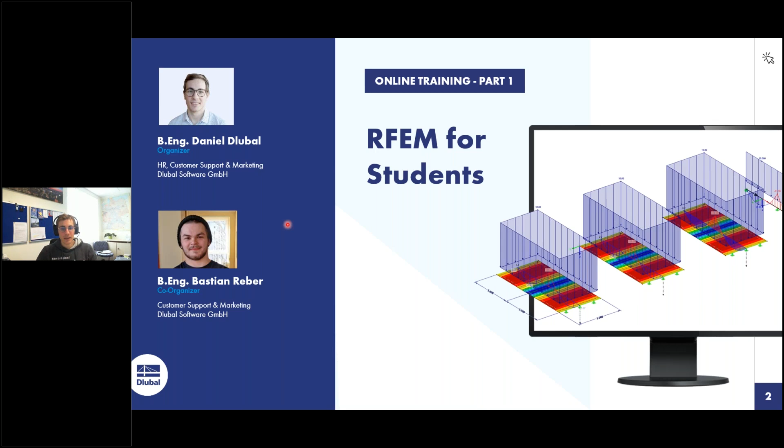Now let's go ahead. For those who are using the GoToWebinar platform for the first time, I would show you the general concept. If you use the desktop application, it can look like that - show or hide control panel. When someone can't listen to us or hear us, just adjust your audio settings, maybe change speakers, and then you can hear us. And if you have any questions, put that in the box, and Bastian or I will answer it.

Then, what is the content of today? First of all, I will explain the principal theory of finite element analysis, or finite element method. Don't be afraid, I won't make lectures like in the study, just 2 slides of very basic theory of finite element method. Then I will introduce you to RFEM, explaining the general user interface, the general concept, the general functions, where you can find what, and so on. Then together we will try to model and calculate a continuous plate.

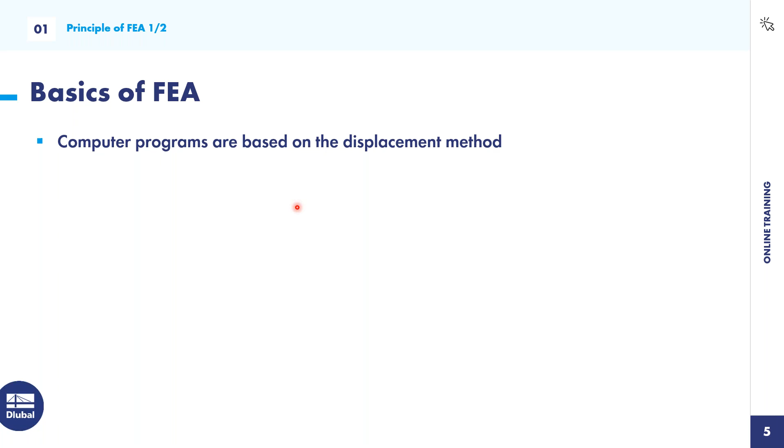But computer programs use the displacement method because it's easier to implement, more convenient, and easier for calculations in the programs. So if you look at any complex structures, it's normal that the analytical solution isn't easy to find.

This is also the reason why real structures are decomposed into a mesh of finite interconnected elements. At each element continuum and at each node, the properties, especially the degrees of freedom like deformation or restraints, are described. So normally the finite element analysis is just a numerical approximation of an exact solution, where the mechanical behavior is described by approximation.

The whole process of decomposing a structure into finite elements is called discretization. Remember that, this is very important: discretization is the decomposition of a structure into finite elements.

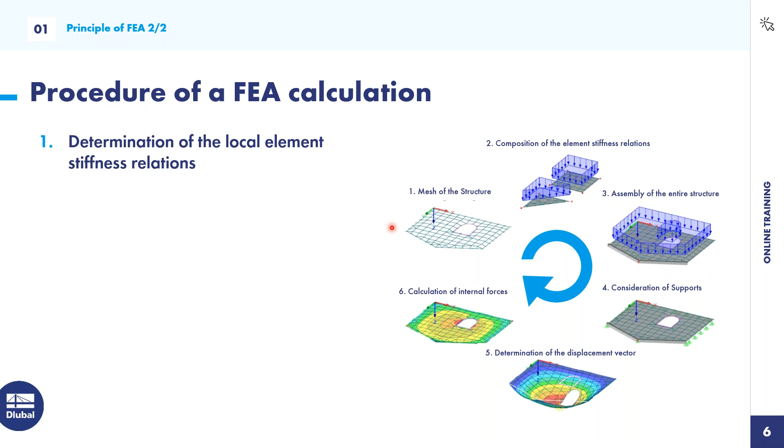So what is the general procedure of an FEA calculation? On the right side you can see this image with the basic steps. First of all, we do the discretization — we determine the local stiffness relations, the local element stiffness matrix at each node. So we mesh the structure, we do the discretization. Then we transform it to the global coordinate system and assemble the entire structure.

Then we also have to consider different supports in order for the structure to be stable. So the boundary conditions are very important to define, and normally the boundary conditions are the support conditions.

As we said before, the displacement method is the method implemented in computer programs. So first we determine the displacement vector, and after that the internal forces like bending moment, shear forces, normal forces, tensions, stresses, strains, and so on. This is also called the solution of the equation system, and then we determine the support forces and internal forces.

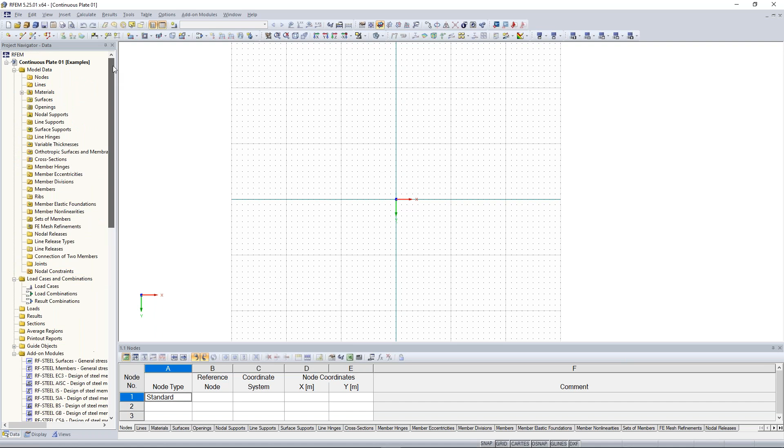Good. So I will explain you now the whole user interface of RFEM. You don't have to do it now with me because I will open another project where I can explain the whole user interface on an already existing project. So just watch and remark maybe some information. I will open here this one. So fine, very good.

I will activate here in the status bar the snap and grid function. So chronologically, the first step is that we have here the menu bar, and here we have the possibility to do almost every kind of workflow function of RFEM.

The basic file functions - you can save, open, import, export, you can insert blocks, save it in the project manager, print, and so on. I think this is known from other software applications.

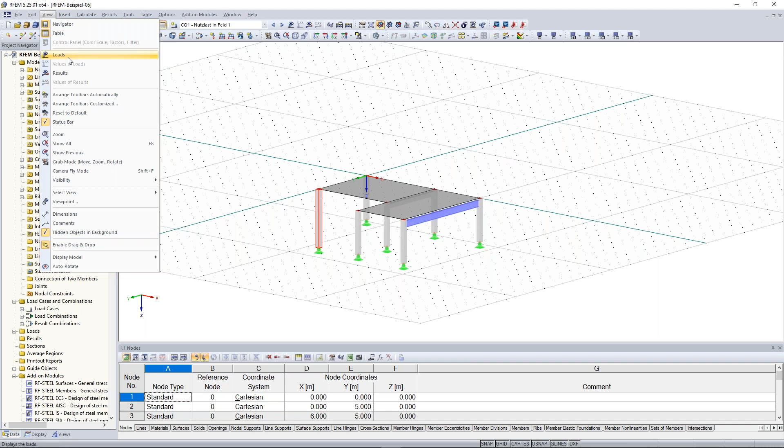Also, you find here additional information concerning the model data, loads, load cases, and combinations. In the view, you can click on loads, then the loads will appear, or click on results - because we don't have any results at the moment, the program asks me if I want to have the results, and I click yes. Now I see also the results, and some other kind of things like comments, dimensions, and so on.

So insert - with this tab you can insert almost every object, from model data to loads and also to load cases and combinations.

The general step in RFEM is that first you model all kinds of necessary objects. So you define materials, cross sections, and then you can also model members, hinges, and finally nodal supports. Then you create your load cases and combinations, then your loads, and then you can calculate it, and you have the possibility to watch the internal forces and the results. This is the basic workflow in RFEM for calculating projects or doing structural analysis.

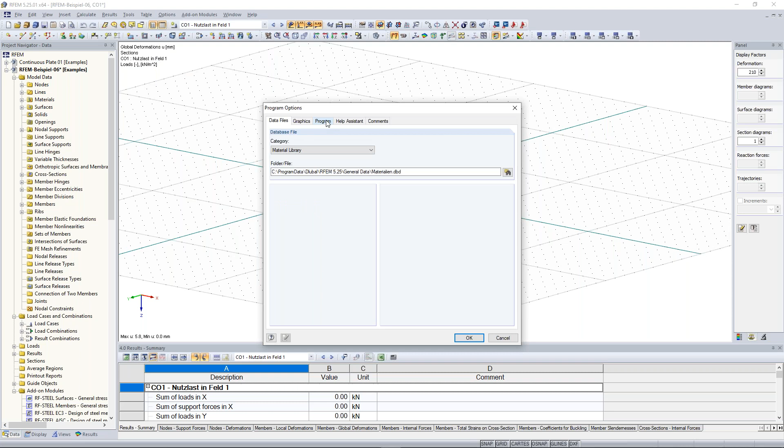The other bars here enable you to access other kinds of projects or functions. Maybe this one is very interesting: the options in the menu bar when you want to change the language. Especially for those from Italy, France, Spain, or similar countries, we have the possibility to change the language into, I think, 10 or 11 languages. The whole interface will change after you quit and restart the program. So Italian, Polish, French - these kinds of languages we offer.

Maybe you see in the background I use a white background here. For those opening RFEM for the first time, you can change your background. In the options, in the configuration manager, you can change the background to black or white. At the moment I use white, but when I double-click on black background, it will change to black. You can also adjust a green or red background - just use the display properties for other colors, and you can adapt your background.

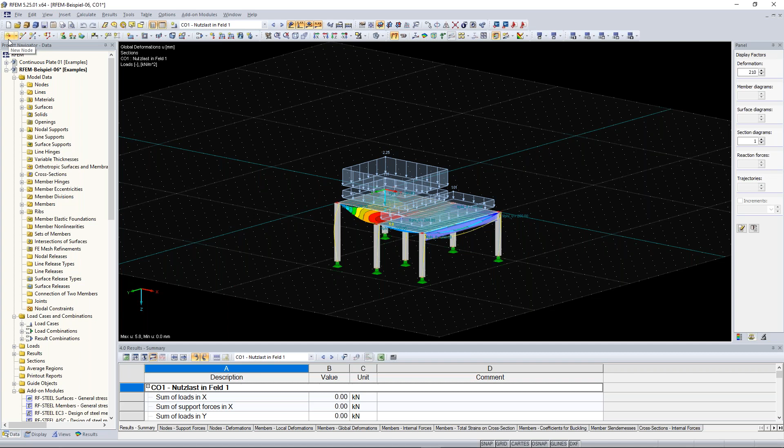I think that's everything for the menu bar. Under the menu bar we find the symbol bar. The symbols enable a fast way to insert objects, views, or edits. So if I want to create a new node, I click on new node, click somewhere, and get new nodes. The same with lines, for example - I click here and then here. This is pretty clear.

Now I will undo it, and I will also change my background again to a white background.

On the left side, you also find the project navigator. It is divided into four registers: data navigator, display navigator, view navigator, and results navigator. In the first one, the data navigator, you find all kinds of objects, beginning from model data, continuing to load cases, loads, results, and so on. You can create new objects, for example, by right-clicking on a node and selecting edit node or new node.

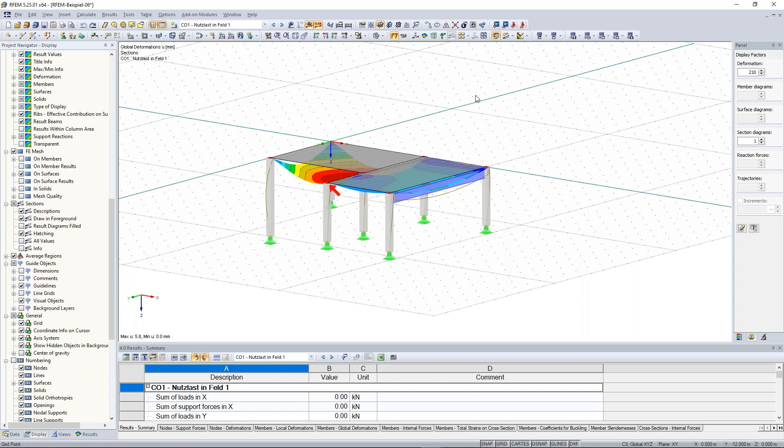You can also hide some kinds of models, like for example the nodal supports. Just click on nodal supports, and the supports disappear, but only in the visibility. The same here also with the results and FE mesh - so when I don't want to see the FE mesh at the moment, click on that and you don't see it.

So far to the display navigator. Let's continue with the view navigator. Sorry for my bad spelling.

If you like a certain view, for example this one, you can create a user-defined view. Just click here on create new user-defined view, favorite. When you rotate or move away from the model and want your favorite view again, just click on favorite and it jumps back to it. This is a big advantage, especially when working with more detailed or complex structures or projects, where you can use these user-defined views.

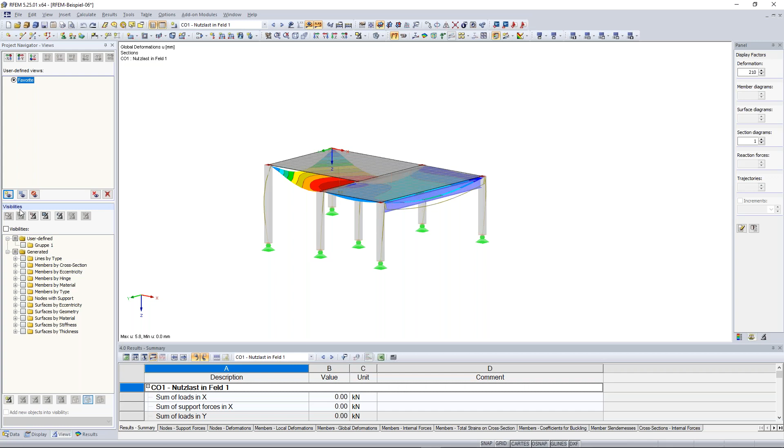With the help of visibilities, you can filter things better. For example, I just want to see all cross sections of this concrete. Go to members by cross section, open this tree and activate the rectangle 300 by 300. Now only this kind of cross section is visible and possible to modify.

You can also right-click and this menu appears, then click on display model, show hidden objects in the background, so the surfaces will disappear and it will look like that. To undo this visibility mode, click on visibility by selected objects, click the arrow, and then cancel visibility mode. You can also do the same thing here.

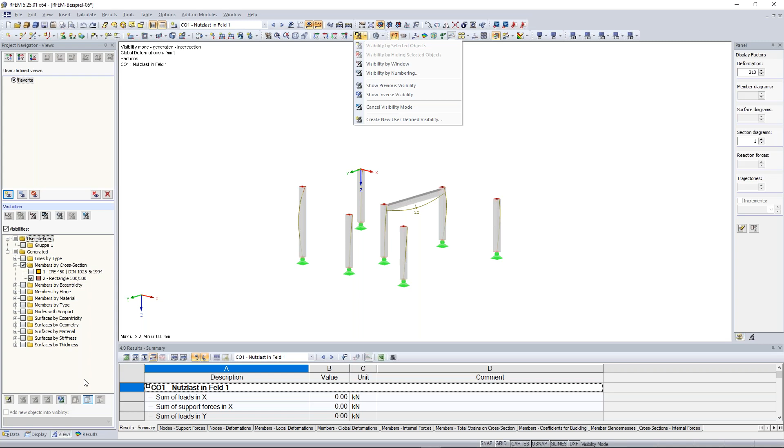Now the last navigator, the result navigator. Here I can see results like deformations, stresses, internal forces of members, and also support reactions. At the moment I see the global deformation of the whole structure, from both the members and the surfaces.

If I just want to look at the members, I click on members and choose the right internal force. In this case I choose the normal force, and there I can see the compression forces in the concrete columns.

Also here, surfaces internal forces, mx, my, and so on. And also the support reactions with the components px, py, pz, and so on.

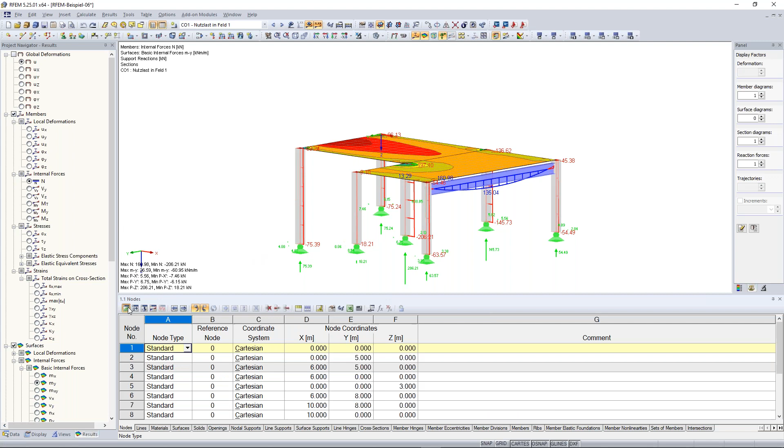So much for the navigator. Now, on the bottom of our user interface, we have also the tables. With the tables, we have the possibility to view all information and also to insert and create new information or objects. For example, I can create a new node here.

So I click on standard. Reference node is my node here, and I enter the coordinates. I click here on x 14, y is 0, and z is 3. And I see the created node here.

This is also possible for almost all other kinds of objects like lines, materials, surfaces, solids, and so on. You can jump to the next tables by clicking the next icons. Now I am at the load cases, nodal loads, or also member loads, line loads, surface loads, results, and so on.

Now maybe to the movement of the RFEM model. With the middle mouse wheel, you can move your whole project.

By clicking the left mouse, you can create a selection window. When you do it from the left corner to the right corner, you select everything which is completely inside this selection window. So in this case, it would be the whole right column with the nodal support and also the node on the top.

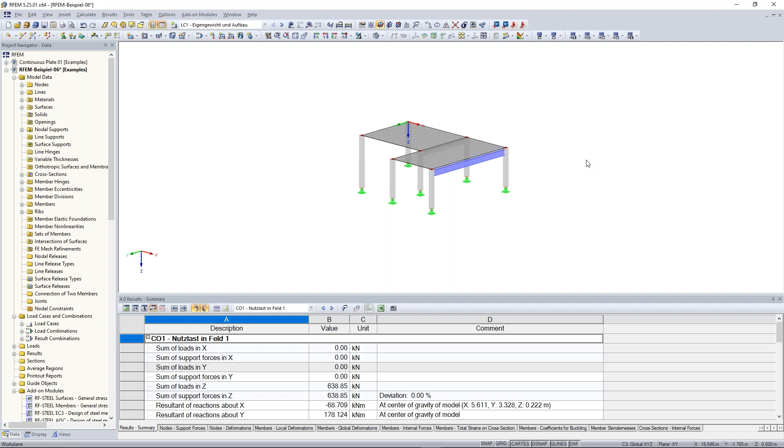With the mouse wheel, you can also zoom in and zoom out. I think this is clear. When you press the control key on your keyboard and also press the mouse wheel, then you can rotate this structure. And when you press the shift key and also the mouse wheel, then you can zoom in and zoom out.

We offer these possibilities also with this icon here in the icon bar: move, zoom, rotate, and so on. There you have the same possibilities.

I think this was everything. Bastian, have I forgotten something or do you want to add something? I think you haven't forgotten anything, and there are also no questions. So I think you can move on.

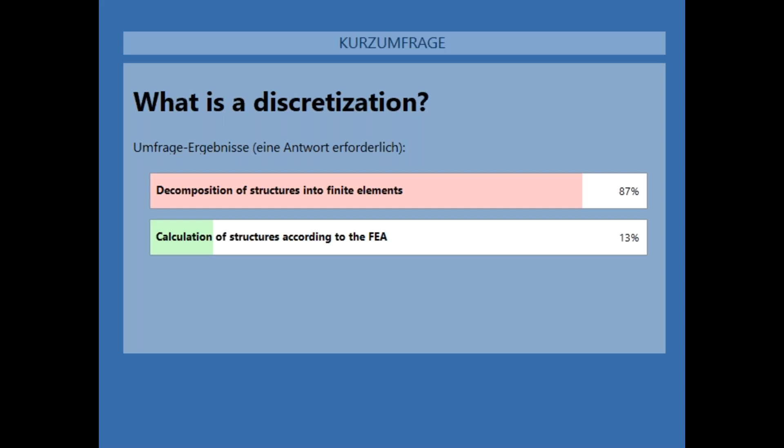Very, very good. So let's start our example. Jump back to the continuous plate. Let's start modeling it. First of all, I create a new surface. In the symbol bar, I find this icon, new rectangular surface, and by clicking on the arrow I find other kinds of surfaces too, but for me it's good to use this rectangle one. I click on that and a new window opens.

The next thing I'm going to do is create the material. In this case I use the Eurocode concrete C30/37 material. For those who don't have this material, no problem - edit the material by clicking this icon and open the material library. There I have the possibility to filter different kinds of materials like concrete, metal, timber, and so on, and also the material category itself, like concrete and lightweight concrete, defined according to the standard.

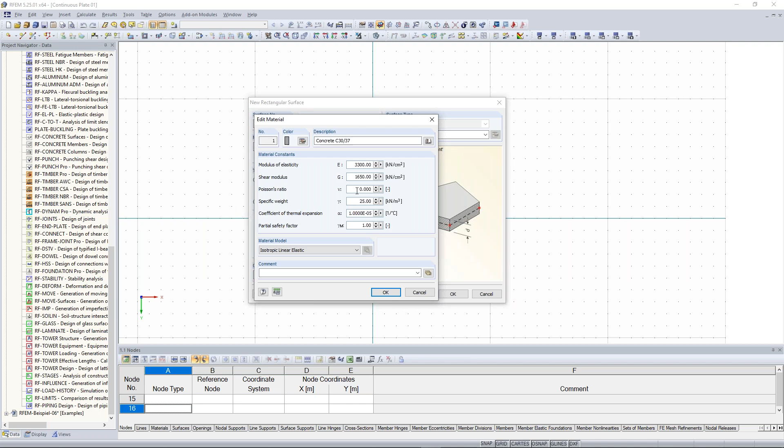I click on OK. Important note is that we set the Poisson's ratio to 0, because we want to get for that example the results which should be constant over the whole plate thickness, so no shear deformation in the plate thickness. I click on OK.

And the thickness of our concrete surface is 300 millimeters. So I click on OK. And now I draw and activate here the snap function.

Now I draw this rectangle from my global coordinate system, 10 meters to the right side and 5 meters high. Good, now right click and I close this way of inserting a new surface. So now I see here the rectangular surface, and now I can copy it or create a new one.

Now one tip, please remember this, it helps me a lot: by clicking the enter or return key on your keyboard, you do the same task again. So our task was the creation of this new rectangular surface - when I click the return key or enter key, it will open this new rectangular surface window again, and I click on OK again.

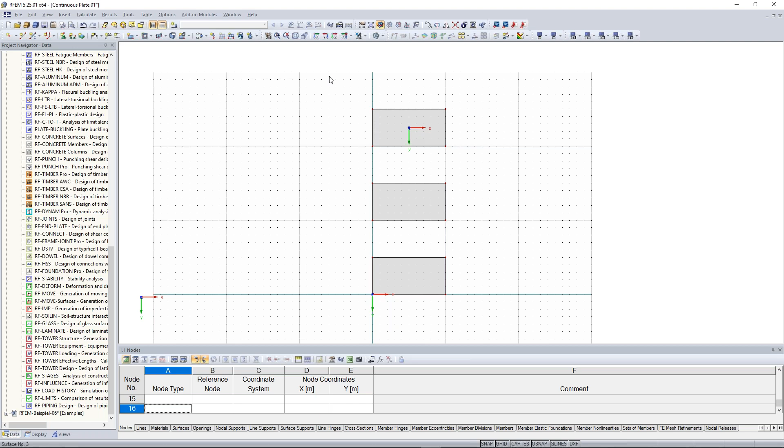And I create the same surface again with the same geometry. Now I do it here again, at a distance of 5 meters from the right upper corner node. So now we move this 10 meters downwards. I select all 3 plates, snap here near this middle surface, near the left bottom corner, and move this to my global coordinate system.

To get the results better, it is useful to use the same thickness of the plate and also reference it to a 1 meter beam. So we create here a new cross section for the member start.

And I click here on import parametric solid cross section, a rectangle. The width of my cross section is 1000 millimeters, and the height is the same as the thickness of my plate, 300 millimeters. The material is the same, concrete C30/37.

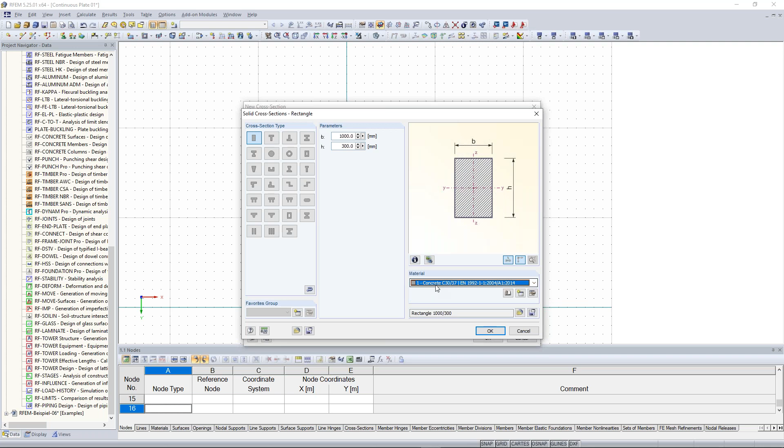I click on OK, and it looks like that. Here I get the cross-section description, also with the cross-section properties, like the moments of inertia, bending, torsion, and so on. I click on OK.

And now the member start has the cross-section of this one, and the member end also has the same. I click on OK. And now I draw it from left to the right, also 10 meters long, and close it with the right click.

Now I can rotate it a little bit, and now I can see it from a 3D perspective.

So the next thing is we want to have a continuous beam and also continuous plate. Therefore, I have to create in the middle lines and also here nodes in order to create afterwards supports. So how can we do that?

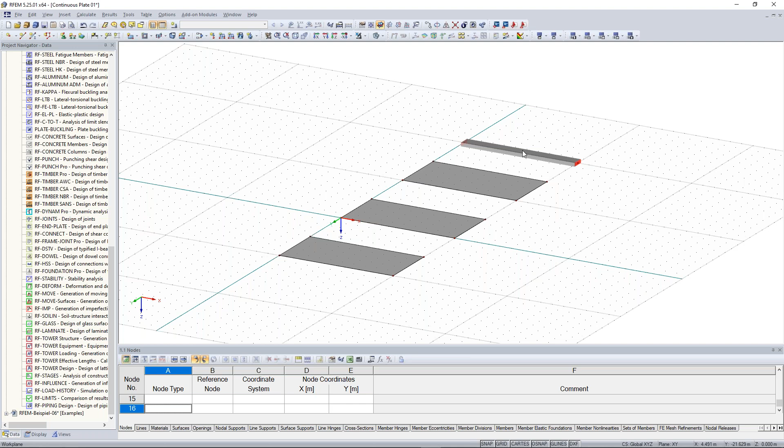We can divide here this line into 2 lines, and then we get here the middle node. And then with the reference of the middle node, we can create the next line perpendicular to the other end.

So you can also see here the line, the red line, and also here the arrow. The arrow shows from the left to the right side, and this symbolizes me that the starting node is on the left side and the end node on the right side.

With right click on one of the line nodes, I can also show the local axis system, and this is similar to the line direction. So the local x-axis of every line or every member is the same as the line direction. So you see it shows to the right, to the same direction.

One important note is that every member has included a line, but not every line has included a member. For example, I have here this member, and I have here included this line. So here I have this member and also the line, but not every line has a member. This is clear because here in this case I have this surface, and these lines are just the boundary lines for this surface.

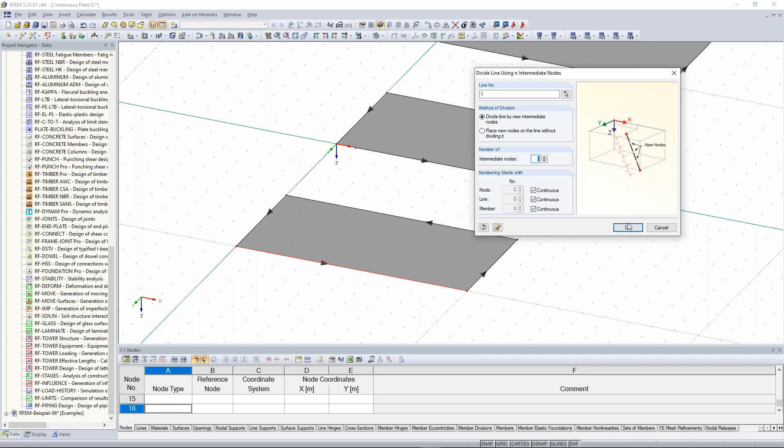I just want to have a middle node, so I can divide it into n intermediate nodes. When I click here 1, it will be divided into 2 parts. When I enter here 2, into 3 parts, 3 into 4 parts, and so on. So I click here on 1, and I see here this node, and these 2 lines are divided.

Next thing is that we create here this line perpendicular to the next one. So click here on new line and draw this line from there to there, and double right click, and we can close this.

Now it comes to my favorite way of creation of objects, and this is the copy via drag and drop. We can easily copy this line by drag and drop.

Just click on that line, press the Control key on your keyboard, and now the left mouse, click and hold and put it to the other surface. And the same thing we do also for the other one.

Good. Now let's divide this member here. Press right click, divide member. Now you can do it by distance or graphically. I decide to do it by distance.

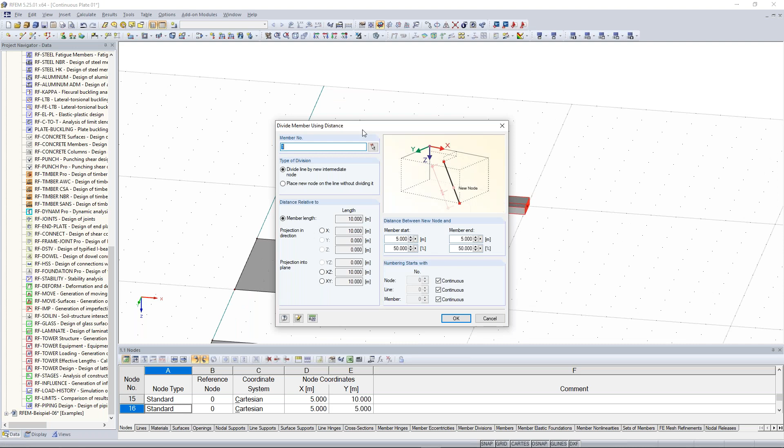Now it's also interesting how we can do that. We want to divide it exactly in the middle. So we can choose here 50% as relation or the absolute value. And it will start from the member start or from the member end. And now here you can see the arrow, and this arrow shows from the left to the right side.

When I want to have a division 3 meters from the start, I have to enter here 3 meters, and the member end will be calculated automatically. The same thing with member end. If I want to go from the right side, so from the member end, press here 6 meters, the member start will be resulted automatically. But in our case, 50%, because we want to divide it exactly in the middle.

I click on OK, and we get here this new node.

Bastian, are there any questions? I see some questions in the chat. So should we show something again? What do you think? I think what you can do is you can show us again how you can edit the cross section, for example, of the beam, and guess that would be nice to see again.

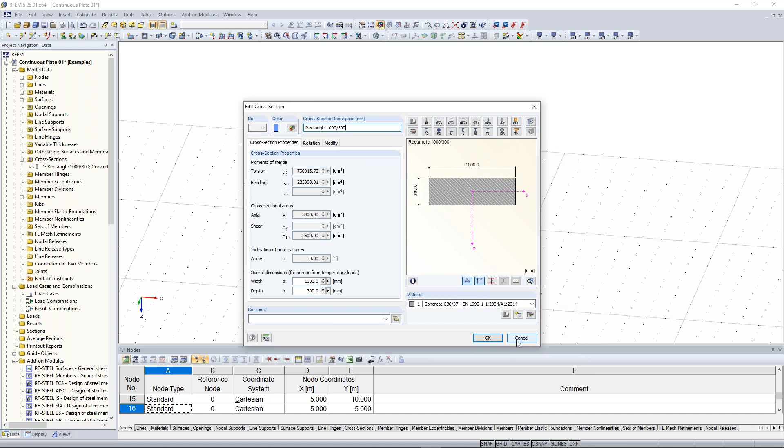This is one way of doing this. Or you choose the whole member by selecting this, right click, member, and edit. Then you can modify your member by editing the cross section stored, or create a new one - same procedure like with the data navigator.

Okay, good, I would continue. Now let's do some supports. It's very easy - we have line supports for surfaces and lines, and also nodal supports for this kind of members. So we create line supports first. We choose this hinged support.

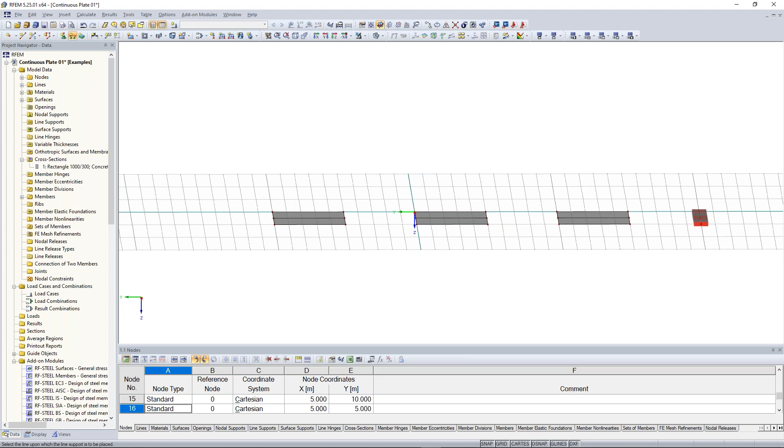I click OK. Now I draw, and this is the big advantage of RFEM - I can choose and select several objects at once. So I rotate my interface a little bit, and now I draw a selection window from the right to the left side in order to get all three middle lines. And the same thing I do with the other surfaces.

Good, now let's come to the member. Here we do two different kinds of nodal supports. The first one is a new type of nodal support, so I click here on new type of nodal support. Now let's watch this definition of support conditions.

If I activate or check one condition, like UZ, then I activate the deformation of UZ - so no deformation in this direction is possible, and therefore there will be some forces. The same also with restraints, for twisting and for moments. So in order to prevent the torsion or twisting of my member, I also have to activate the restraint phi x. This will prevent torsion around the x-axis.

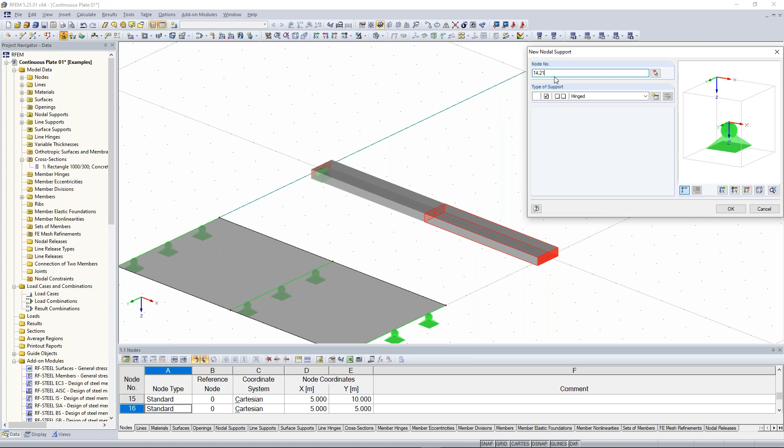Good, now click OK. Draw a selection window just for the first node on the left side, and for the other two nodes you can draw also a selection window. It's no problem that the member is also selected, because we want to create an object just for nodes, and the program recognizes it. Click here on New Nodal Support, and now we can choose the normal hinged support. Because we have already selected the nodes, they appear here in this box. Click OK, and the two supports were created.

Okay, good. Now the next step is the creation of loads. Before we add some loads, we have to create load cases. Click on New Load Case in the symbol bar - you can also do it through load cases, combinations, new load case. Same procedure, as you can see we have more possibilities to insert or create something. So, new load case.

For our simple example, we insert the name or description 'test load' and deactivate the self-weight, in order to compare the results better. Then I click OK.

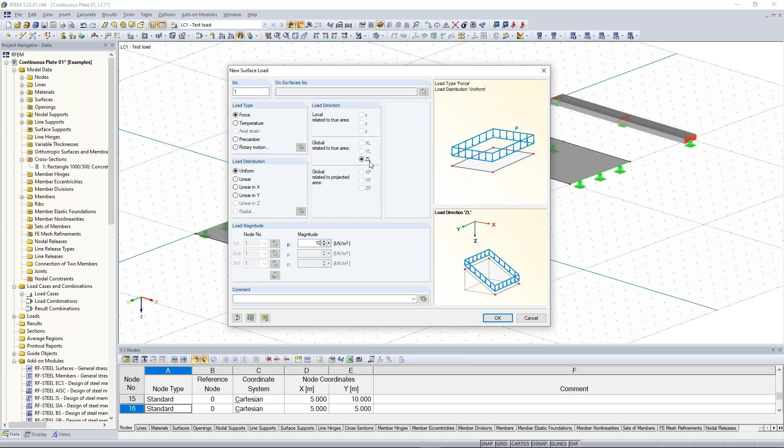I will create surface loads and member loads here. So again, new surface load here in the symbol bar. Here I can set up load types, load direction, uniform load distribution, linear in X, linear in Y, and so on. I add here the magnitude of 10 kilonewton per square meter. Maybe the load direction is greyed out, because we use the model type 2D, so there we have some restrictions concerning the load direction.

I click OK, and I add the loads on the surfaces. Good, and now let's do the same for the continuous member.

One big mistake, especially for RFEM beginners, is to use line loads for members. But we have to use member loads for members. Line loads are used for additional loads on lines - so when I have a railing or handrail on this line and I want to add some loads, then I can use the line load. Or when I want to consider wind loads at lines, I can use line loads. But when I really want to load members, I have to use the member load. Please keep that in mind - for members I use member loads.

So I click on member loads, enter the same load parameter, 10 kilonewton per meter, click OK, and I choose both members.

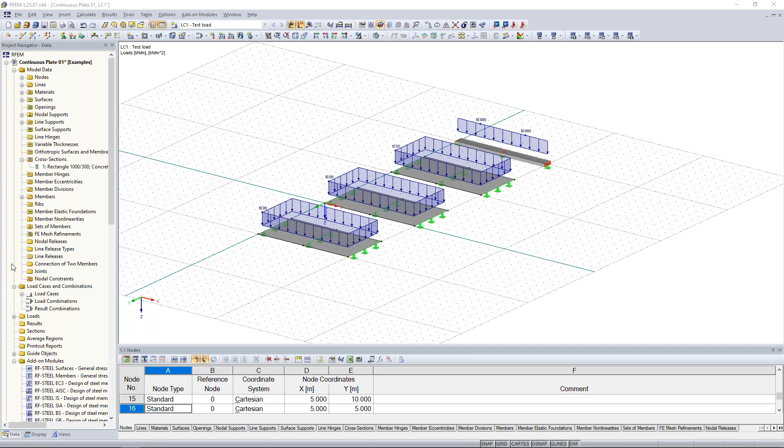Nice. So the next part is the creation of the refinement, so every surface gets a different mesh size. In order to do that, I create here FE mesh refinements. Normally, the whole settings of the FE meshes are managed here at the Calculate tab under FE mesh settings.

Here you set the general target length of the finite elements. So if I would do nothing, every surface would get a finite element length of 0.5 meter. But in this case, I want to have for every surface another one.

So I do here FE mesh refinement, right click, new FE mesh refinement. I choose here at first surface, target FE length 1 meter, so we get 1 meter big meshes. And now I have to choose the surface, and in this case, I choose the first surface. I click on OK, and click on OK again.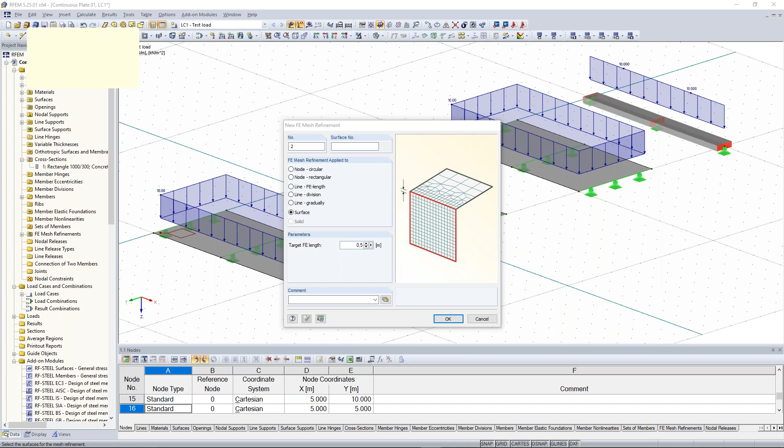Now, let's do the same thing again. Right click here in the data navigator, new FE mesh refinement, 0.5 here at the target FE length. And the surface is this one. I click on OK, on OK again.

And now here we do a different way of insert. Right click, FE mesh refinement, new. Because we have already selected it, it shows me here that we have this third surface. We create a new FE mesh refinement 0.1. Here we see the FE mesh refinement with this quadratic object symbol.

Yeah, and now I would suppose that we calculate it. And before we do it, in order to compare the results better to each other, it would be quite helpful if we have sections here at the surfaces.

In order to do that, here in the data navigator, we have also the possibility to create sections. Just right click, new section. The section name is 1-1 or something like that. You can also do A, or whatever, it's up to you. The sectional surface or the projection direction is here, the global z-axis.

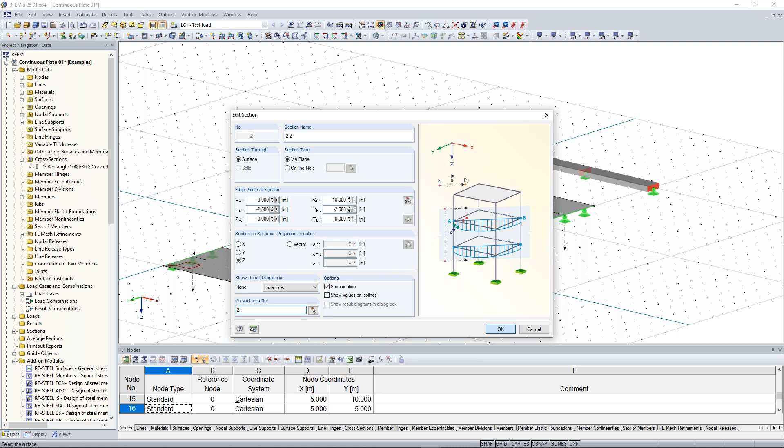So, modify or edit here the section name, and choose here the correct surface. And let's do this thing again, choose here also the correct surface and click on OK.

Good. Now I think we have everything. What do we need for our calculation?

The next thing is starting the calculation. Therefore, you can use here calculate all in the symbol bar, or also here calculate RFEM results only, or to calculate, and there you can choose your load case or your load combinations and so on. The topic of defining load combinations and so on will be part of the next chapters, in the next parts of our student series of online training.

So I click here on calculate all. And the first thing we gonna see are the deformations. So here the deformation,

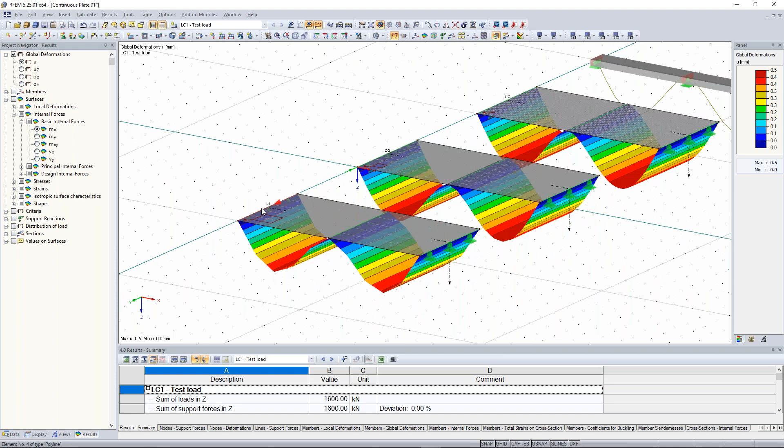and also a very nice thing is when I change here the display model to the wireframe display model, I see here also the size of the FE meshes. And as we said before, here in this first surface, we have a FE mesh size of 1 meter, 0.5, and 0.1.

Good. In order to see the results here at the beam, we have to activate members, and we see here the bending moments. Field moment, support moment, also the shear forces and so on. But I think this is clear.

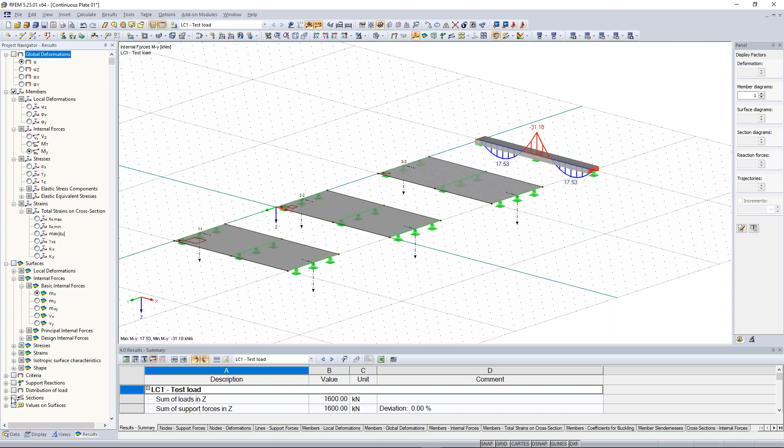More interesting are maybe the sections of the surfaces in order to see the bending moments of the surfaces. Therefore, I activate here in the result navigator sections, and I want to see the bending moments. So I have to activate here surfaces and choose here MX.

One hint to the basic internal forces of these surfaces. You can see here also the local axis of every surface, and at the moment I deactivate maybe for the moment the results, just to see what I want to explain you. Here we see the local axis of this surface, the x-axis and the y-axis. The x-axis points to the global x-axis, and the local y-axis also to the global y-axis there.

So now, important point, the basic internal forces like mx and my, they are located in the same direction like here. So mx is along to the x-axis, to the local x-axis of this surface, and the same for my.

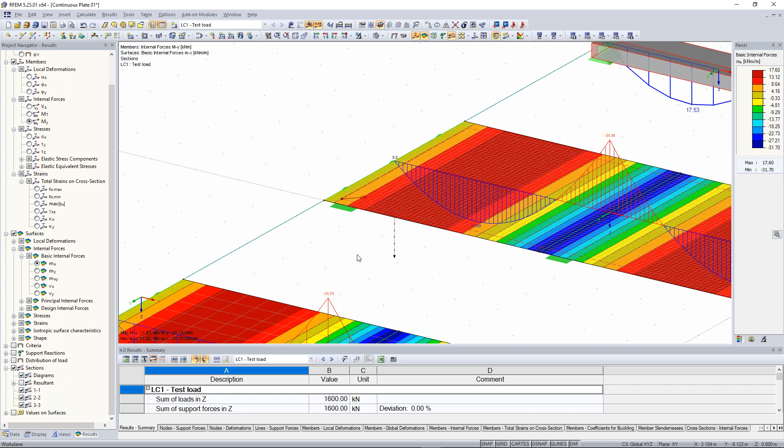But now this will be very important. The length of this FE mesh, here you see it's linear, and normally it's everywhere linear, but here we have in 1 meter just one FE element, and here we have 10 FE elements in 1 meter. So the approximation of the results will be here very incorrect, I would say, or not really exact. And here it's more exact. You see it here at the distribution of the moment section.

And it isn't really exact in comparison to that one where we have really fine FE mesh sizes. So keep that in mind. The extreme results can be correct almost, but the results between that extreme results can be at the more rough finite element, not so good, like in one FE element.

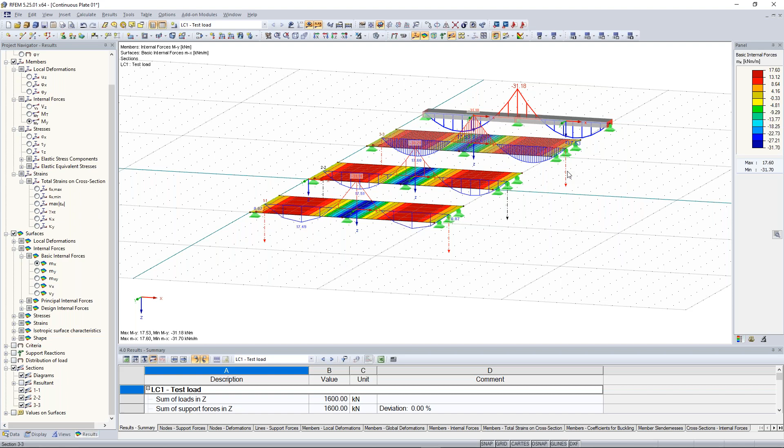I would suppose you do that FE mesh quite fine, but not too fine, because when you have too fine FE meshes, then the calculation will take very long. So you have to find the right proportion, the right FE mesh sizes, in order to have correct and exact values, but also consider the long calculation of FE programs.

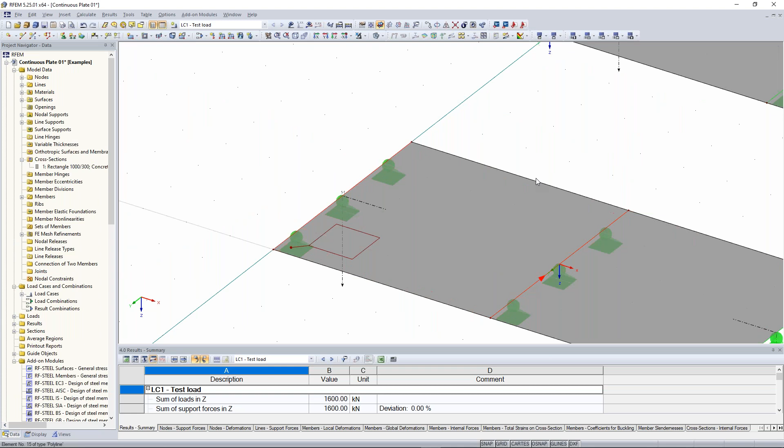Now I see one question, and this question is, what is the suggested FE mesh size? I would recommend you to have at least 4 up to 6 or 8 FE meshes in one surface. So we have here from there to there, it's 5 meters. So at least there should be from one boundary condition to the other boundary condition at least 5 up to 6 meshes, finite elements.

So I would say this one is quite good, this with the mesh size 0.5 meters. This one is very fine, and it is not so important to have so fine FE mesh.

And another question I see, are there any shortcuts for show or hide loads? No, unfortunately not. There are no shortcuts for that kind of things. But maybe Bastian, you could find other shortcuts for other type of functions. This would be good if you could post it as an answer for that question. Okay.

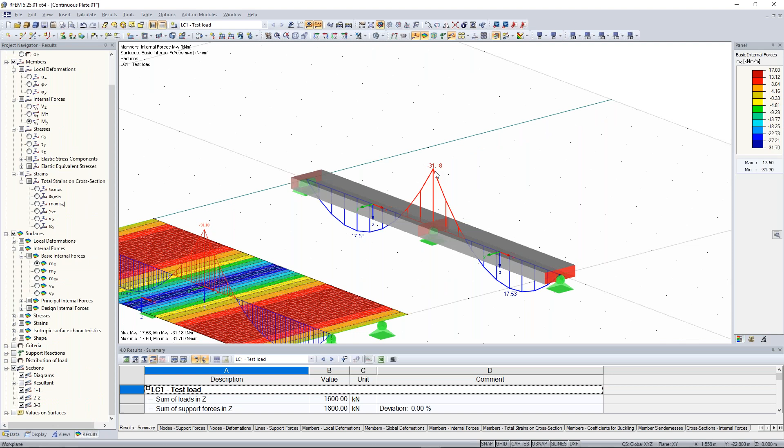Normally in the study, you do some hand calculations. That's pretty common, and therefore you also use tables or calculators. When you calculate the support moment of a two-field beam or continuous beam, you'll get maybe other kind of values. So let's watch the results again. Normally you would get a support moment of 31.25 kilonewton meters, but in this case, just 31.18.

Why? It's due to the shear activation of members. So I go here to calculation parameters, and here you see the activation of shear stiffness of members. If I activate it, it considers additional shear forces and therefore also additional deformation, and you calculate it as not as stiff. In Germany, you would say schubweich. So with the activation of these cross-sectional areas AY and AZ, additional areas of cross-section.

This will be very interesting for the next chapter, because I have also prepared a PowerPoint for that. So I jump back to my PowerPoint.

Now I want to take a look at the plate theory. First of all, we try to relate it to the beam element. On one side we have the Bernoulli beam, and on the other side the Timoshenko beam. The Bernoulli beam says the cross-section remains in plane, and also remains perpendicular to the member axis. We don't consider any shear deformation, so we have really rigid shear stiffness. When you calculate something in the study with tables, you will calculate a Bernoulli beam.

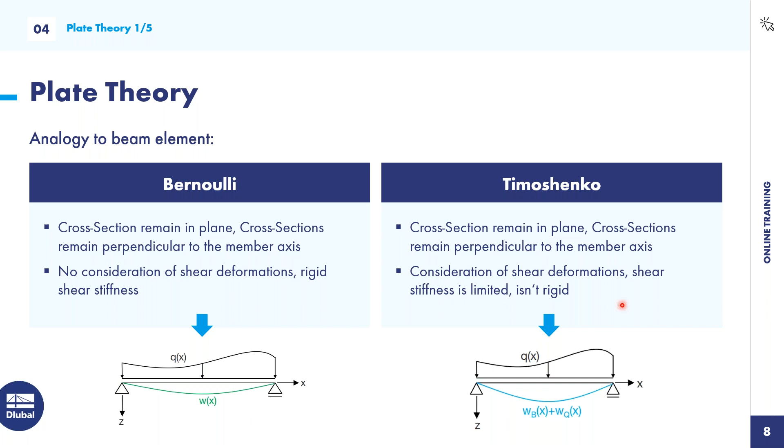But what is most often implemented in FEA programs is the Timoshenko beam, or also the other plate theory. First let's look at the Timoshenko beam. The first condition is the same: the cross-section remains in plane and remains perpendicular to the member axis. But what we consider here is shear deformations, so the shear stiffness is limited and not rigid anymore. Here it remains perpendicular to the axis, but here we get an additional angle, so it won't be perpendicular anymore to the member axis - additional deformation in the Timoshenko theory.

Now let's transfer the beam theory to the plate theory. The Bernoulli beam in the plate theory is the Kirchhoff theory, and the Timoshenko beam is the Reissner-Mindlin theory. What are the conditions? We have a geometrically linear system, small deformation, Hooke's law, cross-section remains flat, no warping, and a constant thickness. We don't consider any shear deformations.

Reissner-Mindlin: the first four conditions are the same, but we consider shear deformations and also the transverse and lateral strain. What is that last one? When I have this kind of beam and I try to tie it with a force, it will get a little bit longer - that part is called delta L. Also the cross section becomes a little bit smaller, and this effect is called the transverse or lateral strain. In German, we would say Querdehnungseffekt.

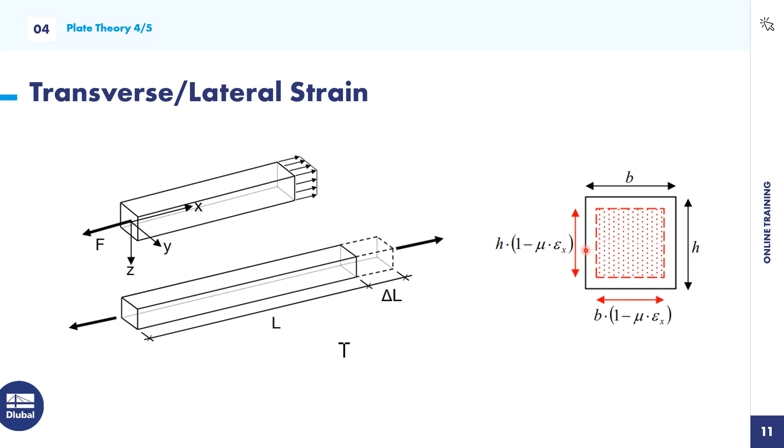Again, as a summary: Kirchhoff on the left side, Reissner-Mindlin on the right side. Kirchhoff is the same as Bernoulli, and Reissner-Mindlin the same as the Timoshenko beam. At Kirchhoff, we don't consider any kind of shear deformations, and at Reissner-Mindlin we consider shear deformations. So what can we use Kirchhoff for?

We can use Kirchhoff for the theory of thin plates. For normal concrete surfaces, like in story buildings or something like that, we can get quite good results with the Kirchhoff theory. It's a simplified approach. The Reissner-Mindlin theory considers shear deformation, and we can use it for thick plates as well as thin plates. When you calculate according to Reissner-Mindlin, you will get quite good results for both thin and thick plates.

Because it's a higher value approach, we get also more accurate shear forces. So my recommendation is please use Reissner-Mindlin, because then you get quite good results for almost every kind of application area. When you use Kirchhoff for very thick plates, like plates with a thickness of 2 or 3 meters, like foundations or something like that, the results won't be so correct.

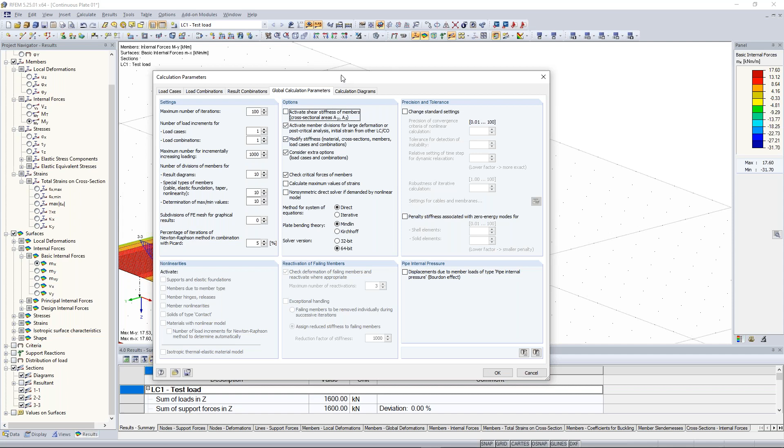Now let's jump back to RFEM and see what happens when I change the calculation parameters - the activation of the shear stiffness of members. I deactivate it, so now I calculate according to the Bernoulli beam, no shear deformation. I recalculate it, and I get the support moment of my two-field beam of 31.25. This will be the same when you calculate it according to tables, or do it by the force method or by hand. So keep that in mind.

Okay Bastian, are there any questions? I don't think you missed something, we have no unanswered questions. Well, feel free to ask. Oh wait, there's a new one. But I think it's better if I answer this by my own, because this doesn't have that much to do with the online training right now.

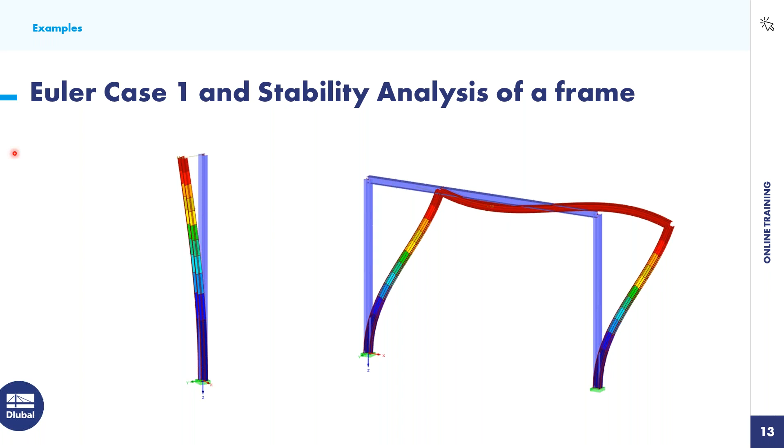Okay, so let's go ahead. I create a new file, a new model here in RFEM. In this case, I insert Euler case 01, save it under downloads, and very important, I want to consider a 3D model, because we calculate a stability analysis of this Euler beam, and there I want to consider both buckling directions. So therefore 3D, I click on OK.

What we're going to do now is creating this column. Therefore, click here on New Single Member. Click on Create New Cross Section for Member Start. We choose a steel profile, what is very common in Germany, HEB 300. I click here on Import Rolled Cross Section HEB, or when I can't find it here, you can also import a cross section from the library. Click here on I sections, and choose this HEB.

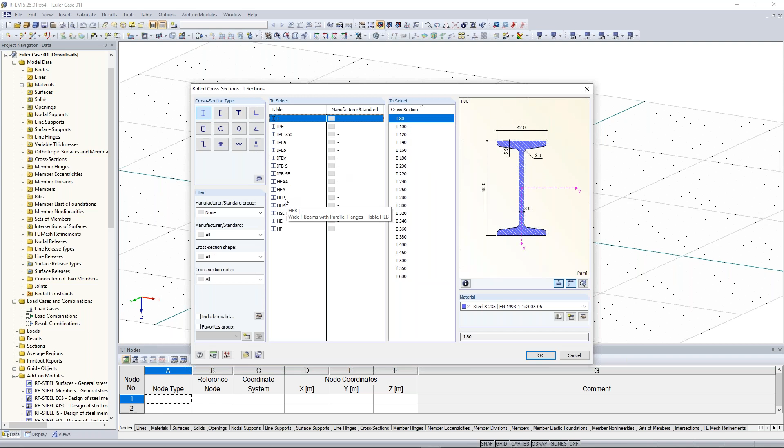So what are HEBs? These are wide I-beams with parallel flanges. And we choose here this HEB 300.

Material is steel S235. We can also edit this material. I choose this steel material according to the Eurocode. You can also import some material from the material library. Steel S235 because of this yield strength of 23.5 kilonewton per square centimeter. I click on OK.

Again, now I want to create this column, and this is also maybe one of the mistakes, when I want to create a column and I'm not in the correct work plane, that I can't model it into the height. It doesn't work because I am here in this work plane. Two possibilities: I change the work plane, for example in XZ, and then I draw it 10 meters high.

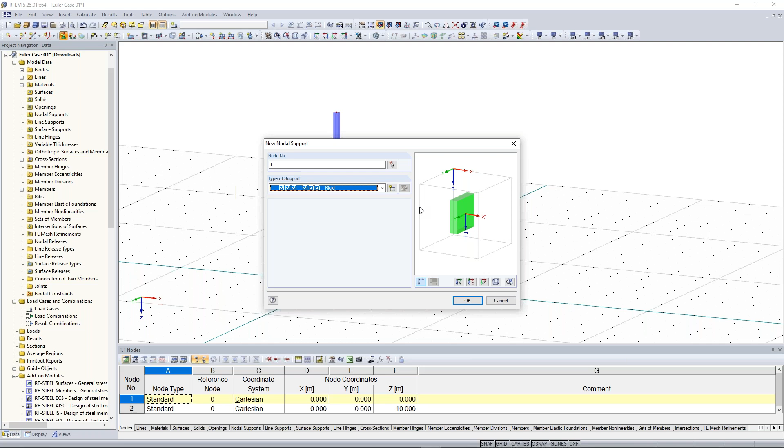This is one tip. I delete the right column, and now I will add here this support, nodal support. In this case, we have a rigid support, so the whole node is fixed in every direction. So there will be horizontal and vertical forces and also bending moments around all axes, which can be transferred into this nodal support.

Good, now this was everything concerning the creation of modeling. Now we create a new load case. The load case will be test load. And we don't consider the self-weight again. I click on OK.

Now we create a new nodal force, on that node here. Therefore, we click on new nodal load. You find it here at the symbol bar, new nodal load. This nodal load refers to the global coordinate system. I put here a horizontal force in the global x direction of 10 kilonewton and vertical force 100 kilonewton. I click on OK and select the head node here.

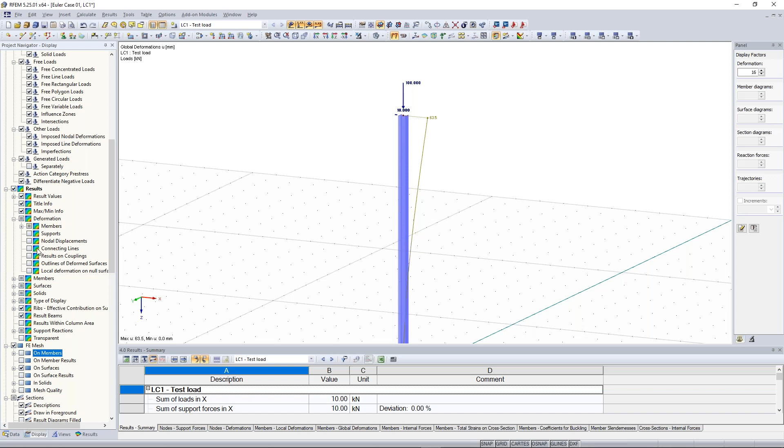Therefore, we go to the display navigator, scroll to the chapter results, and jump to the chapter deformation, members, and I want the cross sections to be colored. I click here and we see the cross section colored, also the deformation of the member. I think the deformation is pretty clear. We have here this horizontal deformation, mainly, maybe also a little bit pressed. Okay, good.

Now, also interesting is the calculation theories. Maybe the calculation according to the first theory of order, then also the second theory of order, and so on, all of the P-delta.

When I do the calculation of load cases, I build the equilibrium of the system at an undeformed system. The second theory of order calculates the equilibrium at a deformed system. There can be some differences, especially when talking about internal forces like the bending moment.

Therefore I want to show you the differences. I will create 3 windows in order to show you the results of this column a little bit better. So I click here, new window. Again on new window, and now I show the windows in 3 windows.

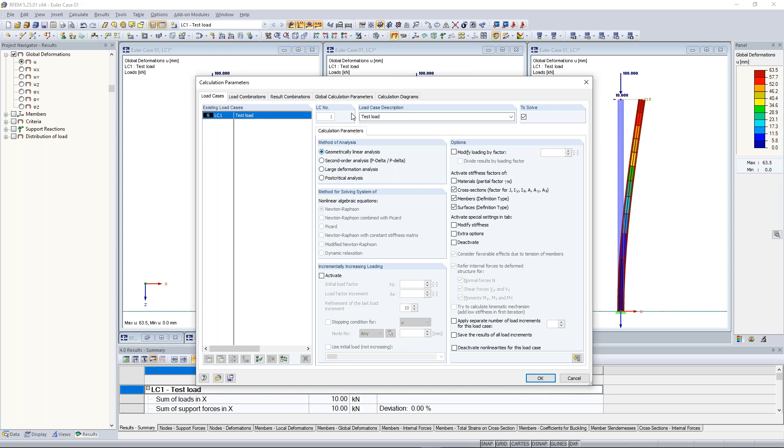And go to the register load cases. There we have our load case, test load. Normally the load cases in RFEM are preset with the theory of first order, so we have a geometrically linear analysis. Now we're gonna do a nonlinear geometrical analysis.

So we choose here the second order analysis, P-delta. I think especially the American guys know this as P-delta. I click here on second order, and I calculate it. So let's calculate it.

Maybe you see also here the deformation. They are a little bit different, but this is not the main point. I take a look at the bending moment, especially at the bottom.

There we have 106.87 kilonewton meters. Normally we have a length of 10 meters, a horizontal force of 10 kilonewton, 10 multiplied by the lever arm of 10 meters is 100 kilonewton meters at the bottom as internal bending moment.

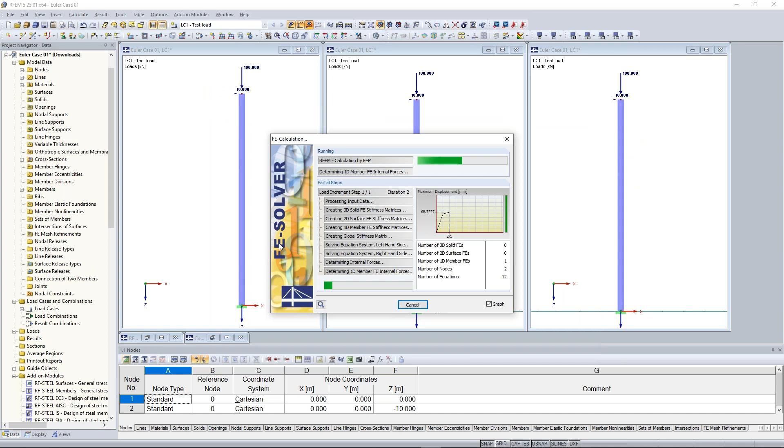And now we get an additional 6 kilonewton meters. Where does it come from? As I said, the geometrical nonlinear analysis according to the theory of second order is the calculation of the equilibrium at the deformed system. Now let's take a look at the deformed system.

The horizontal deformation here at the head node is 68.7 millimeters. Now when you multiply it with the vertical force of 100 kilonewton, you will get an additional bending moment of 6.87 kilonewton meters.

This results in an overall bending moment of 106.87 kilonewton meters. So 10 kilonewton multiplied by the lever arm of 10 meters is 100, plus the addition due to the deformed system.

100 times 68.7 millimeters equals 6.87, and as a sum we get here 106.87 kilonewton meters. So far to the different calculation methods.

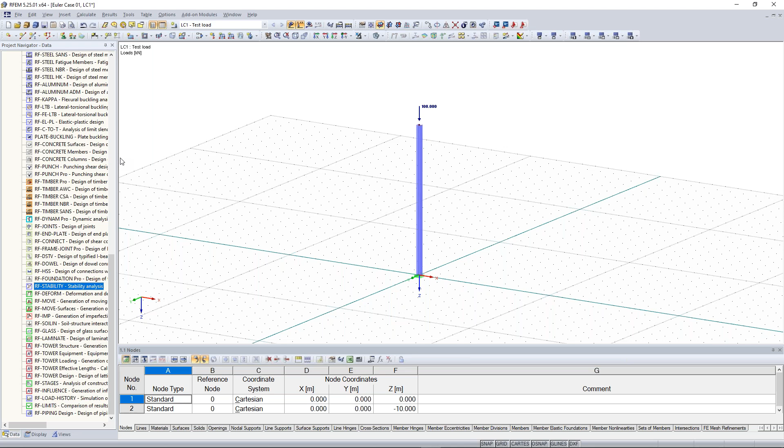You find RF-Stability here in the Data navigator. Scroll down, here you will find it, RF-Stability. Or you find this also here in the menu bar, add-on modules, stability, RF-Stability.

So this new window will open, and what you can do with RF-Stability is do any stability analysis by the eigenvalue method.

So you can calculate eigenforms, buckling forms. You can get the critical lengths, critical forces, critical loads, and so on. This is very good in order to detect maybe some weaknesses of your structure, or to detect some critical points and so on.

Therefore, it's very good. And now let's do the typical Euler case number 1. In the study, I think you have already learned how the first eigenform or the critical buckling of one Euler case looks like. Let's do the same here in RF-Stability.

So first of all, number of lowest eigenvalues. In this case, the Euler case 1, there are only 2 cases important. So I choose here 2. We have the buckling around the weak axis and the buckling around the strong axis.

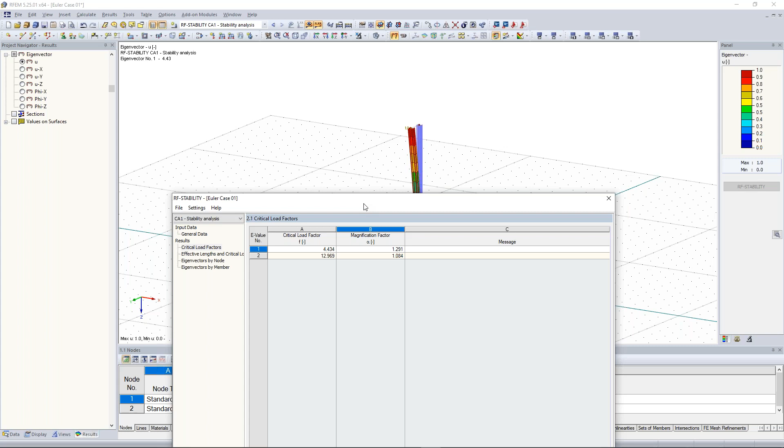So let's watch the eigenform graphics. The first eigenform of this column is the buckling around the weak axis. You can see it here. The weak axis is the z-axis, so around the weak z-axis my system is buckling — this is the first eigenform.

The next eigenform is around the y-axis, because the y-axis is the much stronger axis. I think this is pretty clear. Therefore, because the strong y-axis can resist more loads, the critical load factor is higher, and also the critical load is higher.

Now let's see what happens when I increase the load of 100 kilonewton to 443, still under my critical load. Let's calculate all, because when you have an add-on module open, you have to click calculate all in order to get results from every load case and every add-on module.

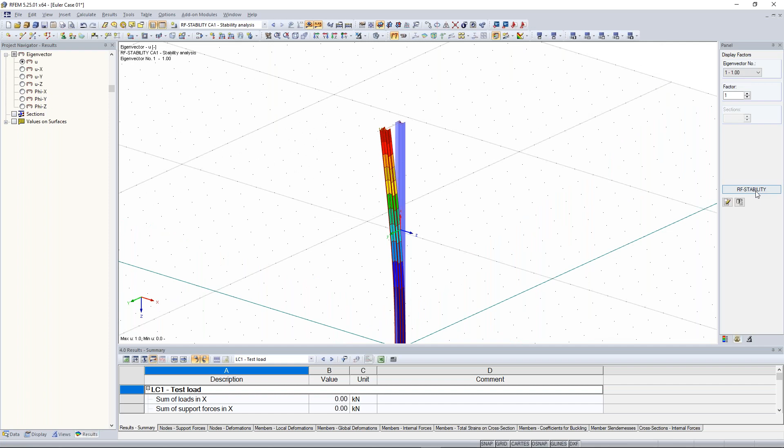Okay, RF-Stability, now we can see it. The critical load factor is exactly 1. This means that the system, with that load of 443 kilonewton, is almost unstable. Now let's see what happens when I increase the load to more than 443, to 444.

Now we get the result and then a calculation error: the stiffness matrix is singular, the model is unstable. And this is the reason — the model is unstable because of that too high load. So in this case my system is unstable, the stiffness matrix is singular.

For that, we have a very good FAQ. Bastia, maybe you could put the FAQ in the chat, and this FAQ will help you find the problems or critical locations why your model is unstable, especially at the beginning of modeling with RFEM. It can be possible that you find these problems.

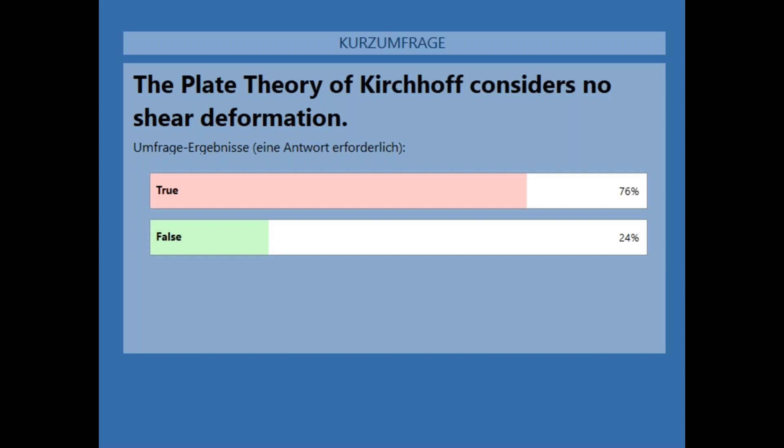So the correct answer is the first one. The plate theory of Kirchhoff considers no shear deformation, so that's correct. And now I have also prepared another question concerning the critical load factor.

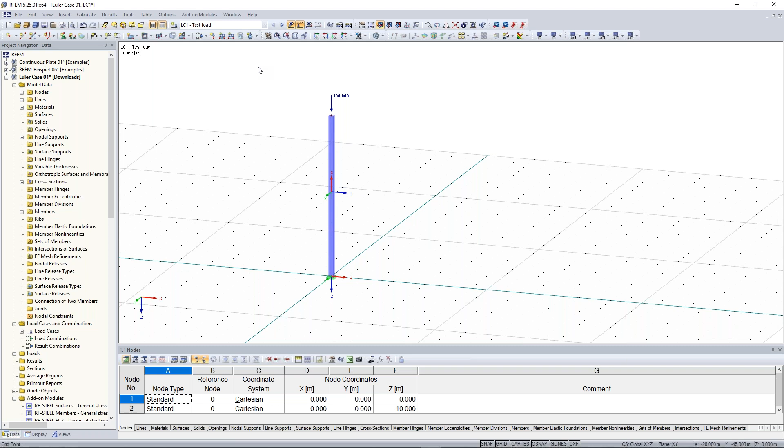Therefore, I change here the nodal force to 100 kilonewton back. And a big advantage now in RFEM is that we can easily copy something. Therefore, I select the whole column, right click, and say move and copy. Now it's important when I want to copy something that I put here a number higher than 0.

And the displacement vector is 10 meters. I can put here 10 meters as a number, or I can also select 2 points in order to get the displacement vector. In this case, I choose this length and this length. It's the same.

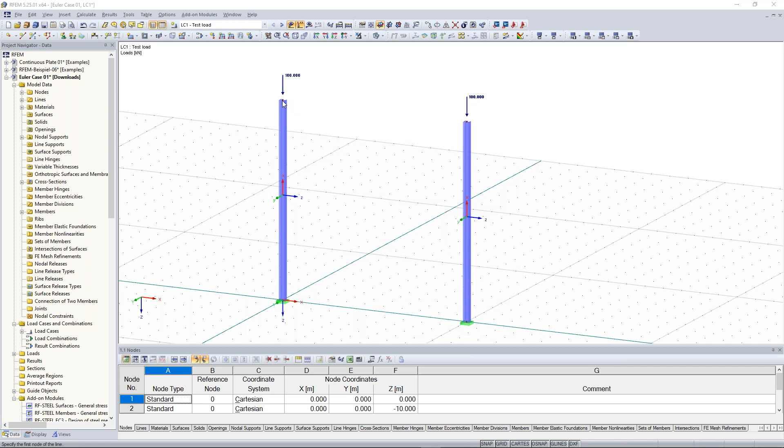Good. Now I need a girder for the frame, and therefore I create a new cross section, in this case also a new single member. I click here in the symbol bar, new single member, and create a new cross section for the member. In this case, I choose the IPE 300 profile. I can also enter this in the cross section description. Material remains steel. Click on OK and draw it from the left column to the right column.

Okay, good. Now I want to change the height of this frame. Therefore, I select both nodes, right click on the member — doesn't matter, member or nodes — and choose the nodes and say, okay, I want to edit it. And because they have the same coordinates, I can modify the z-axis, so the z coordinate. And I choose here -6.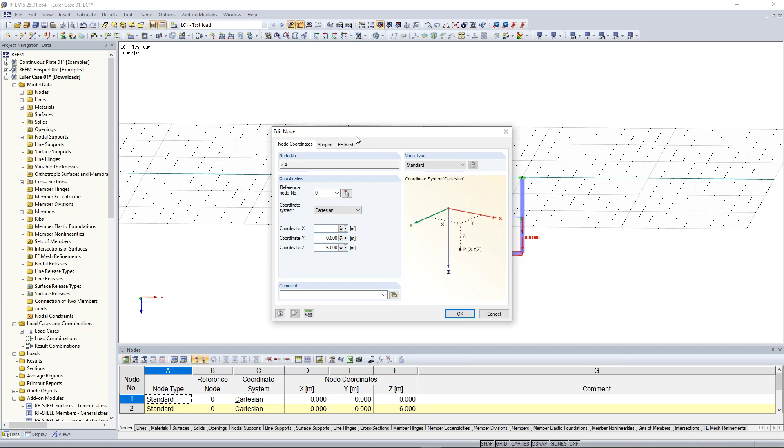So what was the mistake? The mistake was that I also deleted the minus, and now the system was orientated according to the global z-axis, and my global z-axis is located downwards. Therefore the coordinate z plus 6 shows in this direction, but I want it like that, -6. No problem, you can change it afterwards very easily.

Good, now the same thing again. Let's do the stability analysis. Therefore, click here on RF-STABILITY again. And now we'll show a few more eigenvalues, 6 for example. Calculate it.

And now let's watch the eigenvectors. We can see that we have a deformation out of the plane. Normally this isn't so good for frame structures or for steel halls, and we try to prevent these situations. Jump to the next eigenvector — here the same, we have deformation out of the plane, so the eigenform shows out of the plane globally, so the whole system.

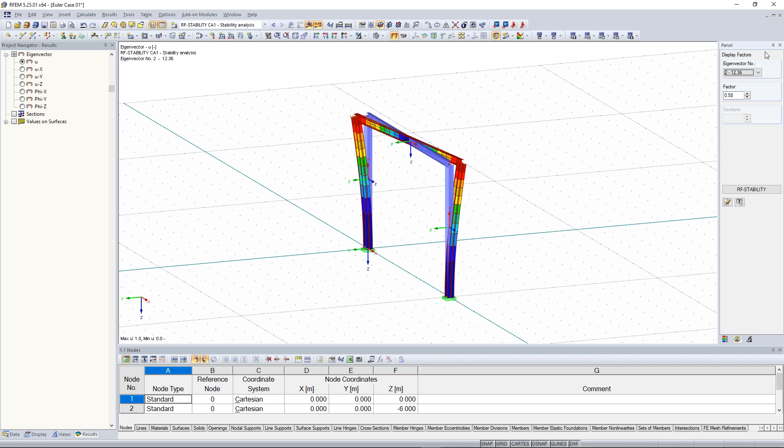The third eigenvector is that eigenform we know maybe also when we have eigenforms in plane. And maybe also watch the other one — this is also out of the plane. How can we prevent this failure out of the plane?

There are two possibilities. When I want to calculate it just 2D, I can assure that buckling out of the plane isn't possible. Then I just change here at the general data — right click, general data — the type of model to 2D, XZ. Let's do it. Calculate RF stability again.

And now let's watch the first eigenvalue, and this is this one. And when I switch to the other ones, only in the plane, and so on.

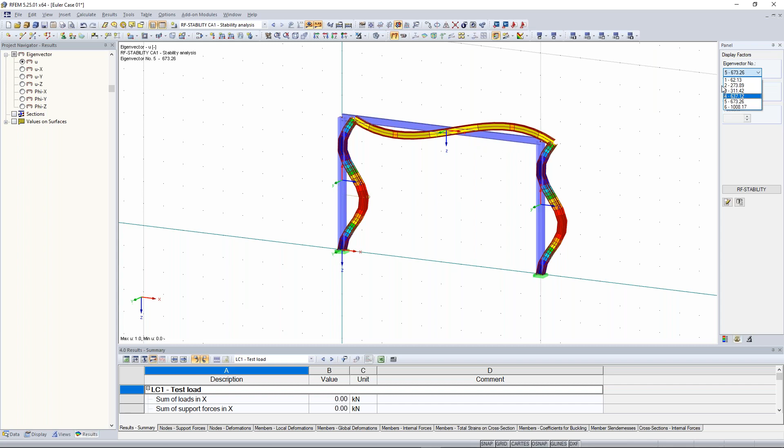So, but how can I prevent this when I have a 3D model? Because normally structures are in 3D. So, general data — 3D again.

I can add additional supports who carry loads from the global y direction. So I select here the upper nodes, create a new nodal support, and now I want this nodal support to carry only forces in the global y direction. Therefore, create a new type of nodal support. I activate the deformation in this direction, and in this case it's UY. I click on OK, and let's see what's going to happen if we have the same cases.

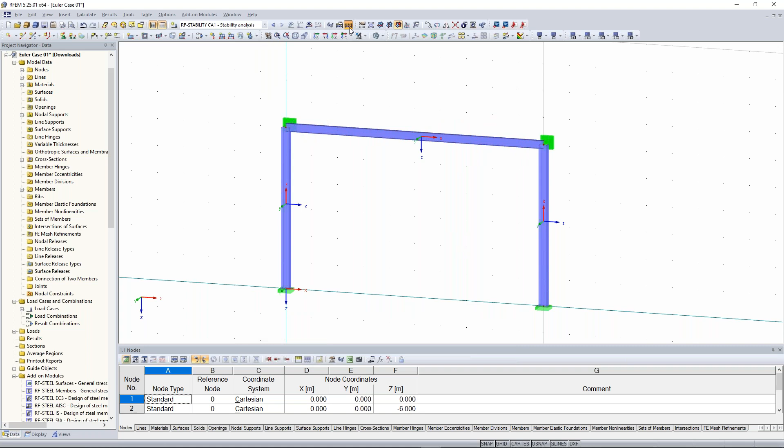Again, the first eigenvalue is here, this one. Next one is this one. This is out of the plane, but only the column, not the upper girder here. This is important to know. So this is more a local failure, and this is a global failure. This is important to know.

Good, I have forgotten one thing, honestly. I'm sorry about that. It's possible when you take a look at the effective lengths, you can use them also for stability analysis, for this steel design, for example. And when you calculate this with your hand calculation and compare the results, it can be possible that your effective length calculated by hand and the result by this program can differentiate, they can be different. This is because of the activation of the shear stiffnesses.

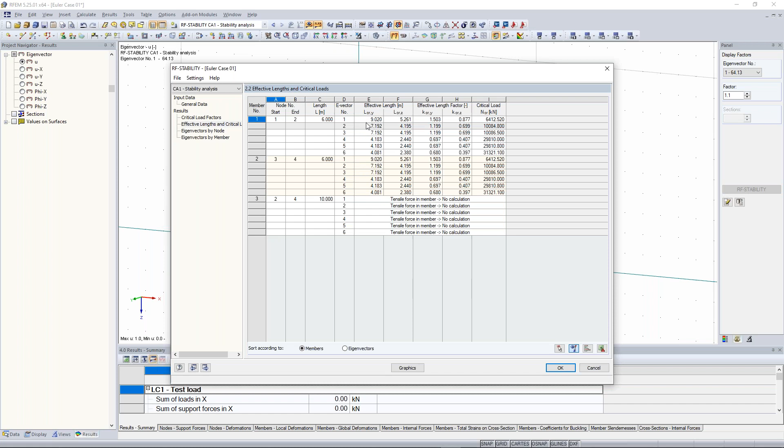So let's take a look at the results. Effective length, remember just here, this one, effective length 9 meters, 9.020. When we change here the calculation parameters and deactivate the shear stiffness and calculate this again, and take a look at the results, we see here different effective lengths. This is due to the shear stiffness. So keep that in mind when you want to compare your hand calculation with the results of the program.

So what does this mean? Effective length, L critical Y. First of all, effective length factor 1.5, so you have to multiply your member length with the effective length factor in order to get the effective length. So when you calculate 6 meters times 1.5, then you will get 9 meters, and 9 meters is this member length here. So you have to imagine that this is the member length here, something like that.

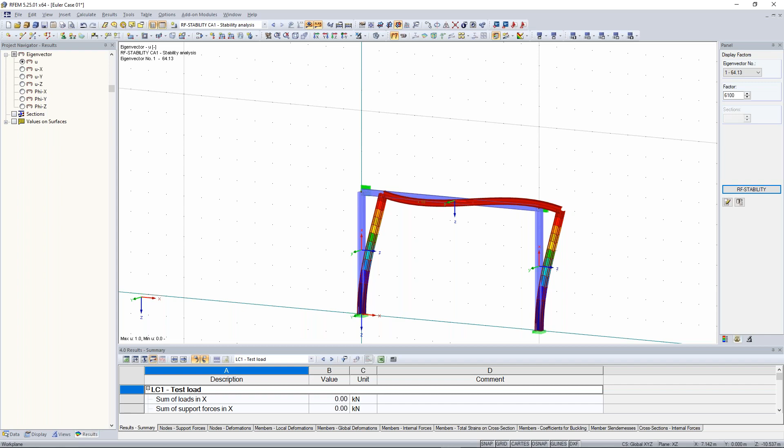There's no specific question, but maybe you want to show us how you can create a joint in the beam, or a joint connection between the column and the beam.

In general, when you use the beam type, every member has a member type, and this is the member type beam. This means that every member is connected to the other one rigidly, so no hinges, stiff connections and stiff joints. When you want to add some hinges, like member hinge or also kind of springs, you can add here member hinge.

Let's do that. So we suppose for the upper girder here at both ends a hinge. Hinge tells me that we don't want to transfer any bending moments to the other part, just shear and normal forces. So therefore I have to activate here Phi Y and Phi Z, and the same also here for the member end, because every member and every line has one starting node and one ending node.

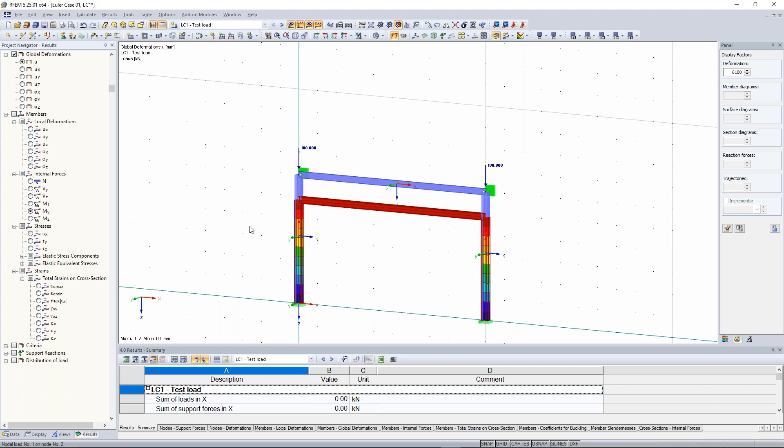Maybe concerning deformation, it would be better when I have a distributed load there, then you can see the results a little better. You see here the deformation, I think that's pretty clear. And also the bending moment, at both ends I have no bending moments.

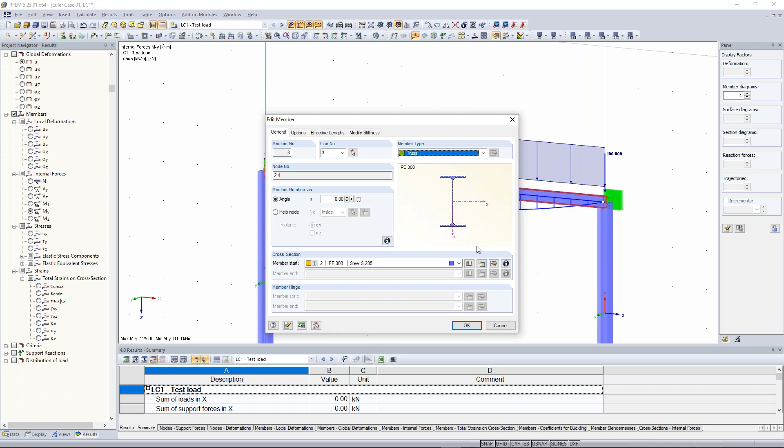And the same thing, this when I have one beam which has on both ends member hinges, then instead of this beam with both member hinges, I can create another member type. I can create here this truss member type. We also offer other kinds of member types, but we come to that in other parts of the training. So I choose here truss. Truss means that I have on both ends also hinges. I click OK, remember the 125 kilonewton meters, I click on calculate, and you will get the same result.

Good, Bastian, any other question? No, you just solved the last question by using this truss member, so no more questions.

Very nice. Now I have prepared the last question for you, Paul. Please answer me that.

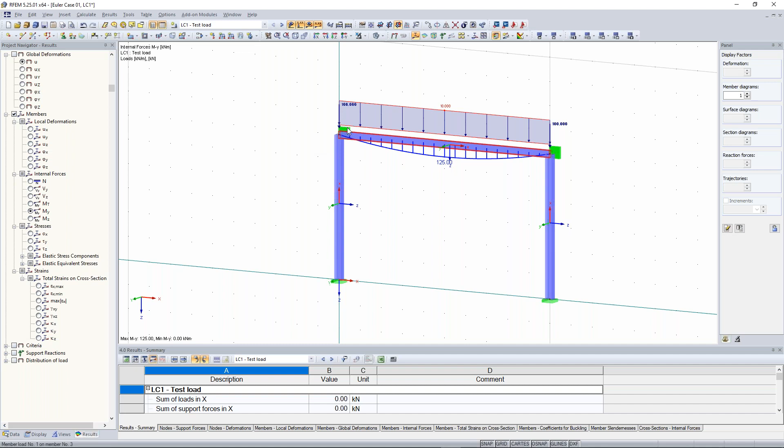I'm sorry for that, but what I wanted to ask is - let me show it to you here at RFEM. When I want a support node which has only horizontal forces, I have to activate uX and uY, these two here. I'm sorry for that bad formulation. But when I have something like this, then horizontal forces in X and Y direction are considered.

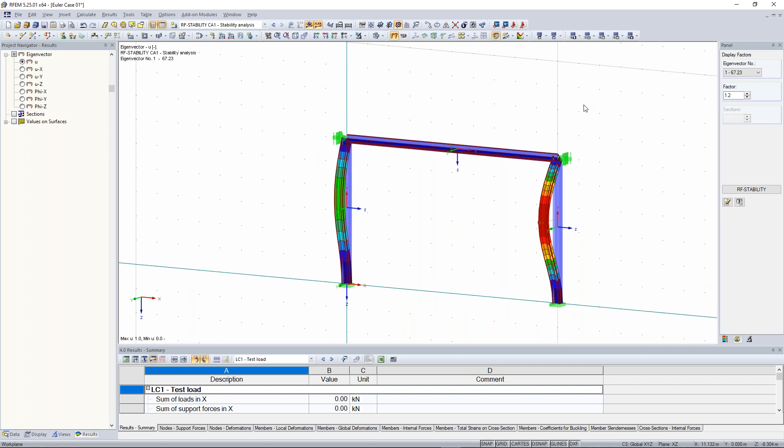Why do we need Phi Z for beam hinge in the previous example? First of all, the calculation of truss stability is almost the same, no differences, and so on - you can calculate this as well.

Now let's jump to the continuous plate. There was one question, why we need Phi Z for beam hinge in previous example. I think you mean this one, this nodal support. Oh, come on, this one I can tell you why - because when we calculate it like that, the beam would rotate over its own axis, so this would cause an instability.

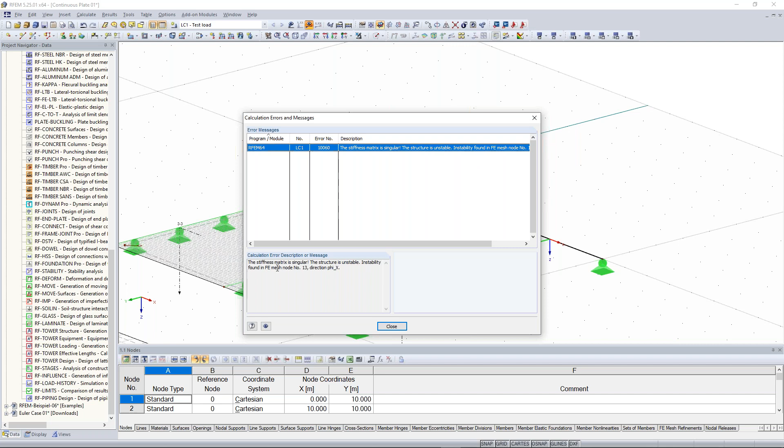I can show it to you, and therefore we have to close this direction of deformation, otherwise it won't be possible to calculate it. The stiffness matrix is singular, instability found, structure is unstable, instability found in FE mesh, node No. 13, direction Phi X. Therefore, we have to close this possibility of movement, and then it works.

So now the other question, can you model two-way slab in 3D and compare it to hand calculation? We will do this in the other parts of training. And yes, today's training or webinar was free for students. Exactly.

So, Bastian, anything to add, or do you have something? You were too fast, because, yeah. Sorry, Bastian. No, but I would say that we have everything. Do you? What do you think?